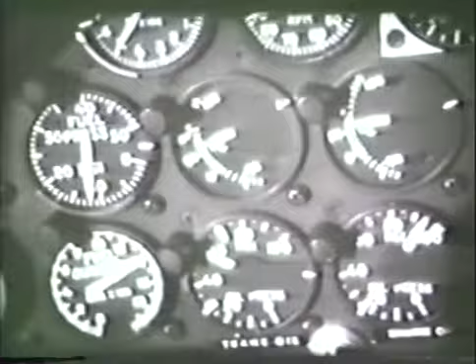These consist of RPM, caution or warning lights, all instruments in the green, fuel quantity, the highest oil temperature, rain removal, and ECU off. A typical pre-takeoff check might sound like this over the Cobra's intercom.

6,600 RPM. No caution or warning lights. All instruments in the green. 1,400 pounds of fuel. Highest oil temperature is 65 degrees on the engine. Rain removal and ECU are off.

There are two types of normal takeoffs available to the aviator, from a hover or from the ground. In the Cobra, the choice is dependent on gross weights, power available, and outside conditions. Hover power should be checked to make this determination.

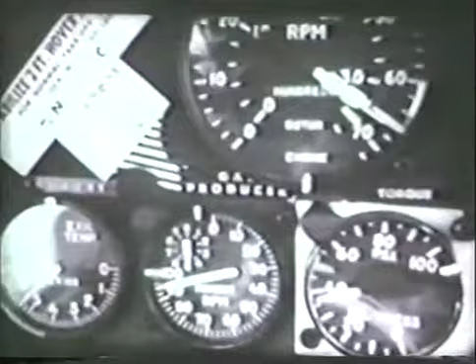Since the Cobra is operated in combat at maximum gross weight conditions, the aviator must constantly keep in mind the aircraft's capabilities and plan accordingly.

When making a normal takeoff from a hover, gentle forward cyclic pressure must be applied to avoid an excessive nose-low attitude, which in turn would result in pulling excessive power.

Because his forward vision is partially blocked in the Cobra's rear seat, the student must again look around the pilot's fixed sight to maintain the desired ground track.

Heading and altitude are maintained until effective translational lift has been obtained. The student then adjusts cyclic and collective to obtain a normal climb of 80 knots indicated and 500 feet per minute.

Now the student is making his clearing turn and pre-takeoff check for the next maneuver, a normal takeoff from the ground. This training maneuver is not necessarily the same as an actual takeoff under maximum gross load conditions, which would be employed when flying the AH-1 in combat. However, it does closely parallel this maneuver and will be used during your training to develop the control touch and coordination required to execute the combat maneuver.

No more than hover power is used to perform this maneuver. To initiate a normal takeoff from the ground, the student pilot applies collective to get the aircraft light on the skids, maintaining neutralized cyclic and pedal settings.

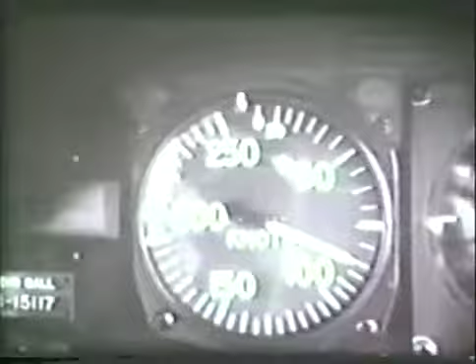Now let's return to the beginning of a stage field traffic pattern. The first instance in which the Cobra's greater airspeed manifests itself during a traffic pattern is after takeoff on the takeoff leg. An airspeed of 80 knots and a climb of 500 feet per minute are maintained until the established pattern altitudes are reached for the takeoff and crosswind legs.

The downwind leg is flown at 100 knots, which makes it important for the aviator to remain especially alert during a pre-landing check as he divides his attention between maintaining the ground track, observing the flight instruments, and announcing the check to the instructor. The pre-landing check is the same as the pre-takeoff check.

The base and final legs are flown at the appropriate altitudes and airspeeds for the intended approach. When turning from base to final, the Cobra's higher airspeed and the visibility restrictions in the rear seat make it especially vital that the student pilot utilize advanced planning and judgment to assure proper lane alignment.

Now let's see how the Cobra's unique capabilities and flight characteristics affect the normal approach. We've seen several examples of how the pilot's fixed sight restricts forward vision when flying the aircraft from the rear station. When making an approach, this restriction becomes even more evident. At the stage field, lane alignment at the desired airspeed and altitude is the first requirement.

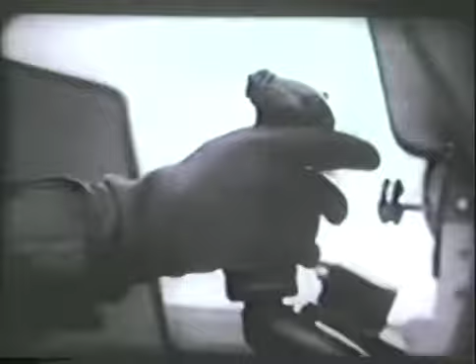The termination with power auto-rotation is designed to develop the skills, reaction, and judgment required of the pilot to make safe auto-rotative descents in the Cobra.

Now let's go back to the start of this maneuver and observe the key procedures which apply to the Cobra. Again, the student is in the rear. With the aircraft at 100 knots, the first step is to align the Cobra with the intended area, in this case a lane at the stage field. The selection of the entry point should be such that an auto-rotated descent at a 70-knot attitude will allow the aircraft to terminate with full power at a 3-foot hover in the center portion of the lane. A rule of thumb for the entry point is an angle slightly greater than a steep approach to the center of the lane.

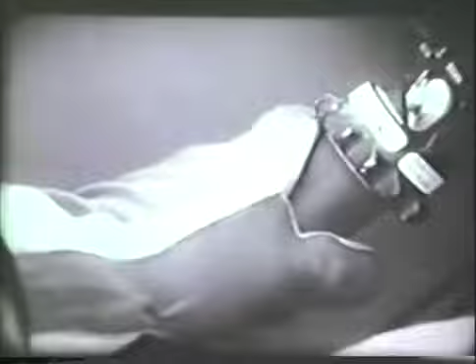Smoothly increase the throttle to full open until the needles are rejoined, and execute a go-around prior to passing through 100 feet above the ground. Due to the rapid acceleration rate of the L-13 engine in the AH-1, the throttle must be rolled on slowly to prevent an overspeed condition.

If the descent is proceeding as planned and no power recovery is required, rejoin the needles prior to passing through 100 feet above the ground. Assume a decelerating attitude between 50 to 100 feet to reduce airspeed and rate of descent. This should be very close to an actual landing attitude. At 10 to 15 feet, make an initial pitch pull, and then a push with power to terminate at a 3-foot hover at or near zero airspeed.

One basic maneuver in which the pilot must become extremely proficient is the forced landing. At this time, we will discuss simulated engine failure only in the speed envelope of 120 knots and below. Simulated failures at higher airspeeds will be discussed during advanced maneuvers. When flying the AH-1, particularly at relatively low altitude, the pilot must be continually alert for suitable forced landing areas. Although the fixed sight and instrument panel restrict forward vision, we have seen that visibility to the sides is excellent.

A practice forced landing is initiated by the instructor with a throttle reduction and the announcement, 'forced landing.' Immediately, the student pilot enters auto-rotation and turns toward the intended landing area if necessary. Wind direction should be considered, but should not be the decisive factor in selecting the area. Rapid vision transition and prior planning will aid in area selection. When establishing a 70-knot auto-rotated descent, he cross-checks and announces the rotor and gas producer RPM. He also makes a practice mayday call on the intercom.

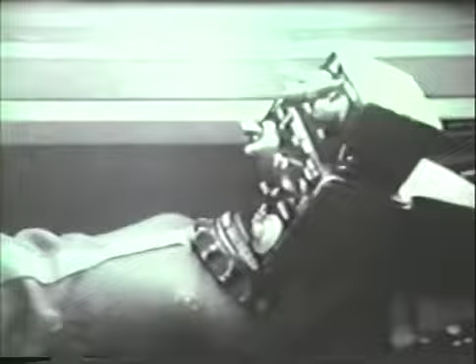As the entry point is reached and the aircraft begins to decelerate below 80 knots, plan to use cyclic as the major control, both to slow the airspeed and to control the angle of approach, with collective at minimum realistic pitch setting. Once deceleration is complete, add collective pitch as necessary to maintain approach angle, keeping airspeed above translational lift, using only the power required and no more.

Now here is the procedure for the shallow approach and running landing in detail. As the entry point is approached, line up with the landing lane or touchdown point. With the reduced forward visibility available in the rear cockpit, it is important that you pick out visible reference landmarks near the touchdown point, as you will not be able to see it when you land.

Once the aircraft has been slowed to the entry speed of 80 knots, reduce collective to achieve the approach angle of 5 to 8 degrees. For training purposes, limit power to 1% less than that required to hover. Then rely on cyclic for major control of deceleration and approach angle. Maintain constant approach angle and proper rate of closure, as evidenced by steady apparent enlargement of the landing area.

Continue to decelerate on the constant approach angle. Plan to use as little lateral cyclic as possible. Keep any turn shallow. Below 50 feet, maintain ground track by slipping the aircraft if necessary. Once deceleration is complete, maintain airspeed above translational lift with cyclic control and collective.

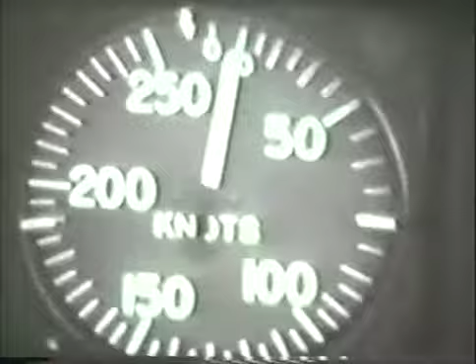As ETL is entered, adjust cyclic to retain the 40-knot attitude. Establish crab passing 50 feet to hold desired ground track. By now, airspeed indicator should show an increase, but will not normally reach 40 knots until more than 100 feet.

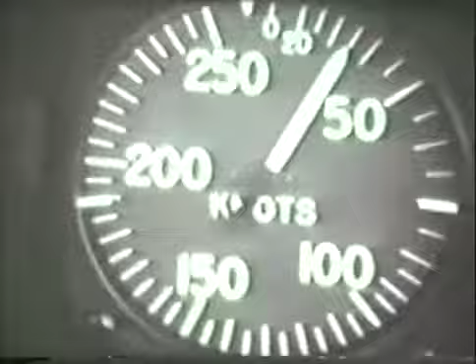If the pre-takeoff calculations were correct, the barrier will be cleared. If not, try more practice at limited allowable power. As the barrier is cleared, apply sufficient forward cyclic to accelerate to normal airspeed.

A successful maximum performance takeoff is a pleasure to watch, and for the successful Cobra pilot, an even greater experience, especially when the alternatives are considered. Remember that variations in operational conditions, such as density altitude, can have an important effect on engine performance. So allow a good margin of safety for this important maneuver.

A 180-degree auto-rotation is one of several precision auto-rotative maneuvers open to the pilot to help him reach a pre-selected touchdown point, in this case, either right or left of a Cobra heading downwind.

Requirements are a point of entry at about 800 to 1,000 feet AGL, entry airspeed 100 knots, descent at 70 knots, rotor RPM 294 to 324, once aligned with the lane. The requirements are the same as for precision auto-rotation.

Make frequent visual checks of rotor RPM during descent, keeping within allowable limits. Remember that RPM builds much faster in the Cobra than in the Huey during auto-rotative turns, especially in a right turn. Adjust collective pitch if necessary to keep the rotor RPM within limits.

Plan the rollout from the turn to be in line with the touchdown point, slipping as necessary in crosswind. Attitude changes are usually slight and easiest to control with a steady aft cyclic pressure during the turn in normal wind conditions. As rollout is completed, maintain 70-knot attitude.

At about 50 feet, decelerate to decrease forward airspeed and rate of descent. Return collective to full down position to avoid rotor RPM decay in the straight portion of the descent. Maintain attitude horizon reference to avoid too fast an airspeed and rate of descent.

At about 15 feet, apply initial pitch. And at 3 to 5 feet, apply sufficient collective pitch to cushion the landing. Remember that the tail skid is lower than the Hueys by a significant amount.

A hovering auto rotation is practiced to develop fast pilot reaction. It requires a vertical descent and a soft touchdown with no lateral drift. Here is the procedure for the hovering auto rotation in detail.

Pick up the aircraft, head into the wind, and stabilize at a 3-foot hover. As soon as the aircraft has been steadied, close throttle to flight idle position, being careful not to change pitch. Simultaneously apply right pedal as required to maintain heading. Apply cyclic control to maintain level attitude.

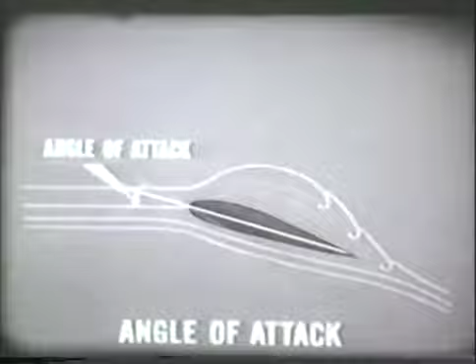Increasing the angle of attack increases the lift of an aircraft up to a certain point. Beyond this point, increasing the angle of attack further causes the airflow to separate from the airfoil, in turn causing burbling and blade stall. Increased velocity of the airfoil due to excessive forward airspeed causes the same effect. A common example of increased angle of attack is in adding collective pitch to hover or achieve vertical climb.

Lift from increased velocity of airflow is gained when the Cobra passes through the point of effective translational lift, then gains altitude.

Retreating blade stall imposes an upper limit on forward airspeed. Here's why. In the hovering mode, lift is distributed equally over the rotor disc. There is an area of zero lift extending in a concentric circle around the rotor hub. At slower forward speeds, the area of zero lift or stall area of the blades is minimized.

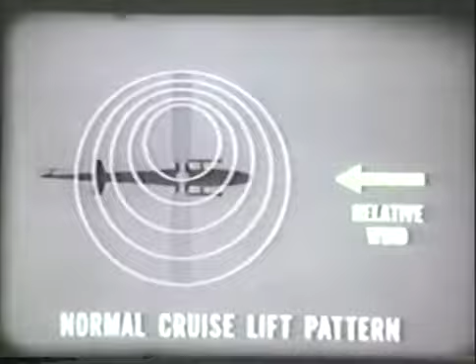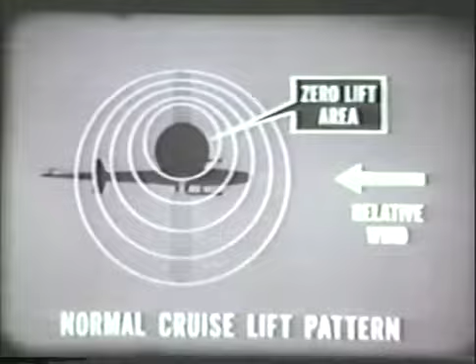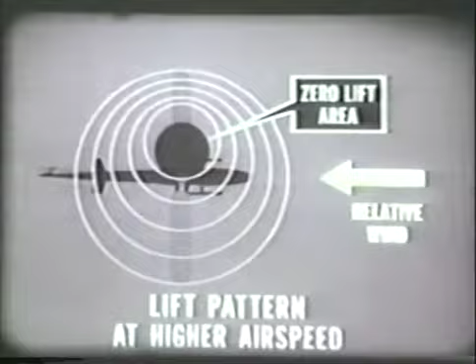The relative wind of any forward speed, however, causes dissymmetry of lift between the advancing and retreating blades. The pattern of incipient stall or zero lift shifts to the retreating blade side. As the Cobra goes even faster and relative wind increases, the tip speeds of the blades are added to the forward airspeed on the advancing side and subtracted on the retreating side, resulting in a loss of lift.

Eventually, any helicopter that goes fast enough will reach a critical airspeed at which the lift of the retreating blade can no longer be made equal to that of the advancing blade, causing retreating blade stall. High G maneuvers will also contribute to this effect. The blade tip stall at first shows up as vibration and buffeting of the airframe.

The nose of the aircraft pitches up, and the aircraft tends to roll left as the rotor disc loses lift in the left rear quadrant. This becomes more severe as the area of lost lift spreads. Unless the basic cause, high angle of attack on the retreating blade, is corrected, control of the aircraft may be lost.

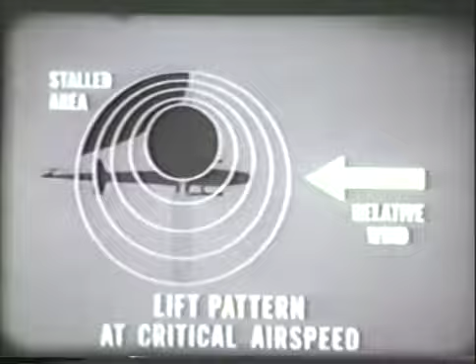Even if the aircraft recovers or seems to recover from the initial nose-up left roll symptom, without corrective action, the basic aerodynamic situation is unchanged and dangerous.

After the initial vibration in the airframe, you will feel cyclic feedback. Reduce collective first, then apply aft cyclic to reduce airspeed and reduce the severity of the maneuver. Then increase rotor RPM. Note that the aft cyclic correction tends to keep the nose up. This is not a natural pilot reaction unless you recognize the problem.

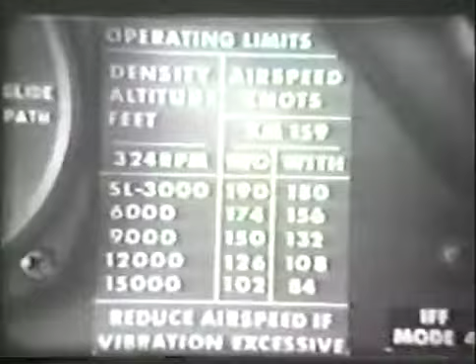Remember, blade stall is rare in the Cobra in level flight, but it is made more likely with high gross weight, altitude, low RPM, and high G maneuvers. The operating limits decal will also serve as a constant reminder of the airspeed limitations during operations, and will assist you in pre-planning maneuvers to avoid blade stall.

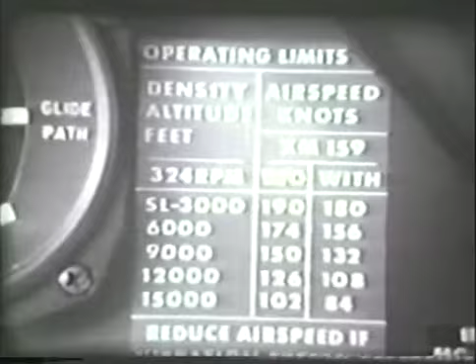In addition, a design feature of the 540 rotor system, pitch cone coupling, helps you fight blade stall by reducing pitch under loading. Pitch cone coupling is known to pilots of the UH-1C model helicopter. However, like the other flight characteristics of the Cobra, it is much more important at increased speeds and G loads.

The principle of pitch cone coupling can be demonstrated on this wooden model representing the rotor hub assembly. Under the stresses of high speed and high G maneuvers, the blades of most two-bladed semi-rigid rotor systems bend, or cone. In most helicopters, such as the Huey, the blades cone more or less along their entire length.

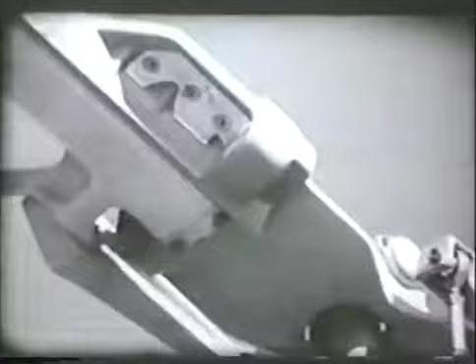This is not true of the Cobra's 540 rotor system. The flexure plate at the center of the rotor hub assembly is designed to do most of the bending, while the blades remain relatively rigid as the rotor system cones. The bending of the flexure plate is simulated on this model with ordinary hinges.

Note that the links representing the pitch change tubes are disconnected. In this case, as the blades cone up, the ends of the pitch horns are free to move down, and the blade pitch remains unchanged.

But the pitch change horns are mechanically linked to the pitch change tubes in practice. This means that when the blades bend or cone up, the pitch change horns cannot move down.

But they automatically push up the trailing edges and reduce the pitch of the rotor blades instead. This can occur either during power flight or auto rotation, anytime a load is imposed on the rotor system. Pitch cone coupling is an automatic mechanical design feature that is said to unload the rotor system.

It must be thoroughly understood and anticipated by the pilot. While it helps fight blade stall at high speeds, it is also possible that excessive rotor RPM will result, unless you closely monitor the instrument panel.

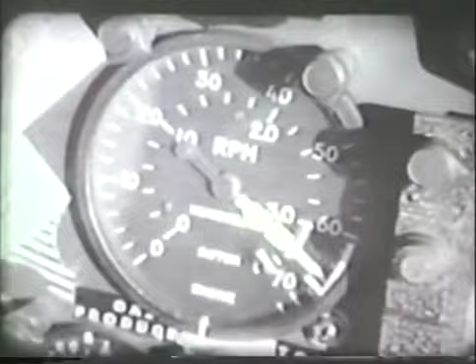If loading is increased severely, the rotor RPM may overspeed above the red line. If this happens, increase collective to replace the washed-out pitch.

Fast rolls and turns bring out another flight characteristic of the Cobra.

Transient torque is an effect of the momentary increase or decrease in the efficiency of the rotor system during turns. In a right turn, the effect is a sudden decrease in torque as the rotor system is unloaded. The pilot may have to add torque to prevent overspeeding.

You may prefer to use more collective, either to tighten the turn or to keep from losing altitude. This will add torque to counteract the loss from the right roll.

Transient torque can be dangerous, especially in left turns. A left rollout is the same as a left turn as far as the effect of transient torque is concerned.

Now the rotor system receives an additional load. It can easily cause an over-torque condition which you must anticipate. Torque reduction may be necessary before starting the roll to avoid over-torquing the aircraft.

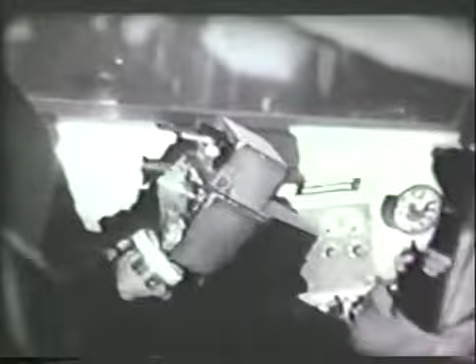Avoid abrupt cyclic movements. Reduce collective power if necessary.

Another important aerodynamic flight characteristic, especially during steep turns and pullouts, is G-loading, the gravitational or centrifugal force acting opposite to the hub axis of the rotor system.

The Cobra is capable of extreme maneuvers that make it relatively easy to impose G-loads that cannot be overcome by the thrust available.

Before starting any maneuver involving G-loads, you must have a precise idea of whether or not you will have enough G capacity to sustain the maneuver. Let us review G-loads in principle as they apply to the Cobra.

In any helicopter, the simplest example of G-loading is in vertical ascent or hovering. The tip-path plane of the rotor blades is horizontal.

Thrust and lift provided by the rotor system combine to act upward vertically, opposite to the weight of the aircraft and any drag of vertical ascent.

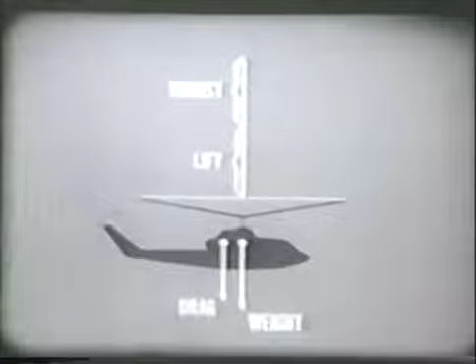When hovering, the sole downward force is essentially the force of gravity, or the weight of the aircraft. To sustain the hover, the rotor system must overcome the acceleration of gravity, or 1G.

Assuming a gross weight of 9,500 pounds, at least an equal amount of rotor thrust, or G capability, must be produced to hover. The Cobra has approximately 21,000 pounds of thrust maximum available on a standard day.

This figure varies from one aircraft to another and must be verified in terms of the day's operating conditions. Using the formula for computing G capability, the 9,500-pound aircraft has 2.21 times as much thrust as it needs to overcome the G-load of a hover.

The remaining amount of thrust, 11,500 pounds, is available for maneuvering.

In any kind of helicopter flight, including horizontal or vertical components, the lifting thrust of the rotor system acts perpendicular to the tip path plane along the hub axis.

This resultant power tilts with the rotor, overcoming weight and drag with horizontal and vertical components that cause a resultant motion. The total or resultant thrust can be resolved into two vectors: lift, the vertical component overcoming weight, and thrust, meaning the horizontal component which overcomes drag.

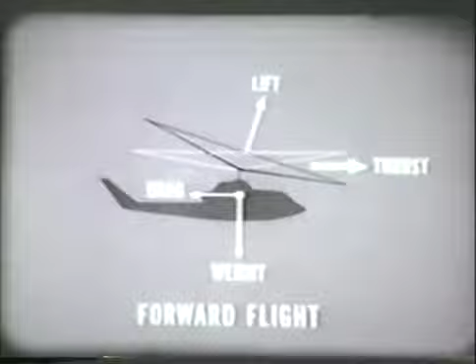In turns and pullouts, G-loads multiply as a measure of the aircraft's acceleration. The total resultant G-load acting on a Cobra in a turn is a centrifugal force pulling the aircraft outwards. To overcome this force, the resultant thrust must be an equal and opposite centripetal force producing enough G capability to sustain the turn or pullout without loss of airspeed or altitude.

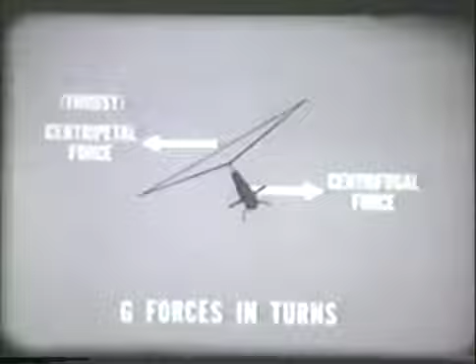In turns, the amount of G-load is directly proportional to the angle of bank. The rotor system must produce enough G's to sustain it. A 30-degree angle of bank measured from the vertical develops a G-load of 1.15 G's. The rotor system must produce 1.15 G's to sustain the bank.

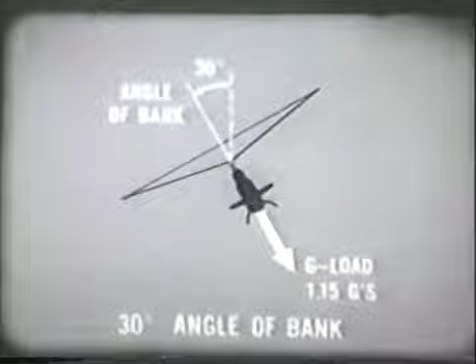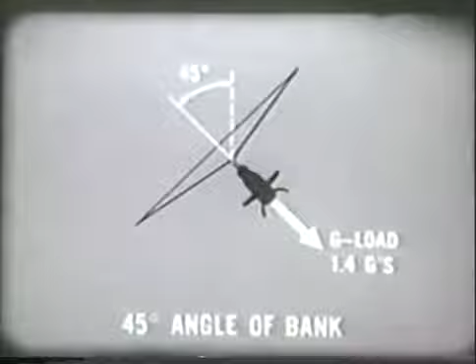A 45-degree angle of bank develops 1.4 G's, still well within the G capability of an aircraft weighing 9,500 pounds, with rotor thrust available of 21,000 pounds. A 60-degree angle of bank develops 2 G's. A Cobra with 9,500-pound gross weight begins to approach the limits of the rotor system's available thrust.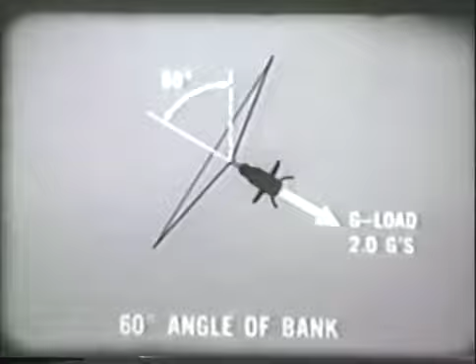Once again, here's why. The total G capability of the rotor system, or the maximum amount of thrust available, is 21,000 pounds on a standard day. Divided by the gross weight, it can produce 2.21 G's maximum. So you have very little left for maneuvering. Remember, the rotor thrust available deteriorates at higher density altitudes or other variations from the standard conditions.

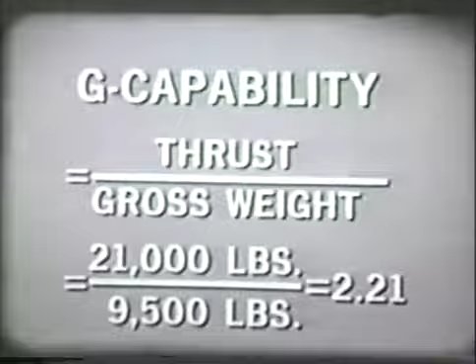A 72-degree angle of bank develops 3 G's, well beyond the G capability of a Cobra weighing 9,500 pounds, or just within the capability of a Cobra weighing 7,000 pounds. Yet the highly maneuverable Cobra can achieve angles of bank up to the vertical and beyond. To you, the pilot, this means an almost certain danger of loss of altitude, airspeed, or both in steep turns that set up G-loads beyond the G capability of the rotor system.

The same general principle applies to high-speed dive recovery. In any low-G maneuvers, such as tactical pushover, a right rolling reaction may occur which is independent of pilot input.

With SCAS operating, the roll tendency is initially corrected automatically and may not be apparent until approaching 0G. Without SCAS, however, if the rate of roll is not corrected when it begins, roll may accelerate to a point not correctable by the instinctive pilot response of left cyclic.

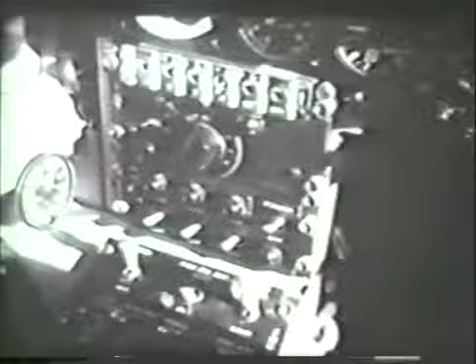In either case, recovery may be quickly accomplished by application of aft cyclic. If SCAS is on, leave it on until recovery is complete. Airspeed or external wing stores have little effect upon the roll tendency of the aircraft. The exact combination of factors which place the pilot in a situation beyond his capabilities is remote.

As in fixed-wing aircraft, for any given angle of bank, the turning radius varies in direct proportion to the square of the airspeed. For example, for an angle of bank of 30 degrees, the radius of turn at 160 knots is 4 times greater than while flying at 80 knots. This can be critical in restricted areas, such as ravines at low altitudes. You should plan ahead for any given angle of bank.

High-speed dives are affected by several aerodynamic flight characteristics. Rates of descent are far higher than in the Huey, with 3,000 feet per minute common in the Cobra. This is due to the slim silhouette, producing less drag, as well as the Cobra's higher airspeed capability. The higher rates of descent can make recovery from high-speed dives a critical maneuver, particularly with high gross weights affecting G capability. Wide differences can be found in pullouts.

It is important to know the variables that affect rate of descent and therefore the altitude loss after pullout begins. Different airspeeds cause important differences in the Cobra's pullout capability. Here, two Cobras with other variables equal demonstrate that the faster aircraft develops a much faster rate of descent. It can be expected to lose far more altitude at pullout. If you're used to pulling out over the treetops, better check your airspeed and rate of descent before you try this in a Cobra.

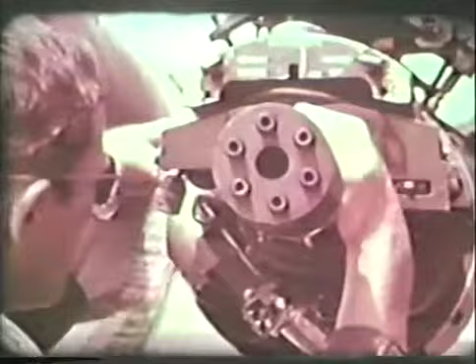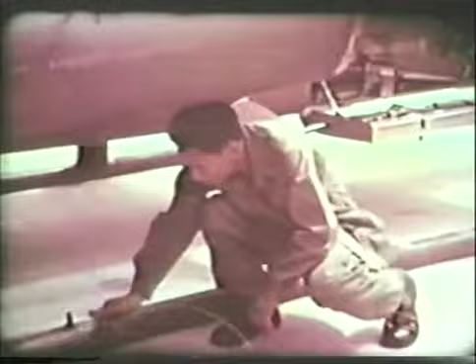Next, ensure that the area to the front of the weapon is clear. The timing of the XM-18 should also be confirmed. Be sure that all cannon plugs are connected and seated. The seating of the rocket pod contacts must be checked. Finally, check to be sure that the aircraft is free of grounding wires.

Okay, Leon, let's get it in here, man. Control.

The checks that the crew has just completed are checks that should also be conducted as a post-flight inspection. The purpose of such checks is obvious: to ensure the proper functioning of the weapons in order to make the most efficient use of this vast fire capability.

Most requests for direct fire support come from the ground commander. He communicates his location and the location of the target relative to it.

Mad Maryland 1-6, Cobra 3-6, over. Cobra 3-6, this is Mad Maryland 1-6, I have you in sight, over. Maryland 1-6, this is Cobra 3-6, situation report, over. This is Maryland 1-6. My unit is pinned down approximately 10 meters north of the road, running east and west to your 12 o'clock position. Enemy target, 140 degrees, 200 meters from my location, over.